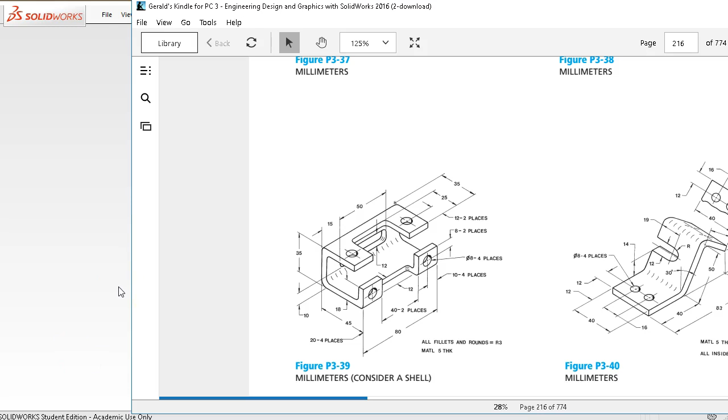P3-39 is in millimeters, and it has the note "consider a shell." This really doesn't lend itself, in my opinion, to a shell. I would lean towards sheet metal, and then we would be able to unfold this and actually manufacture it.

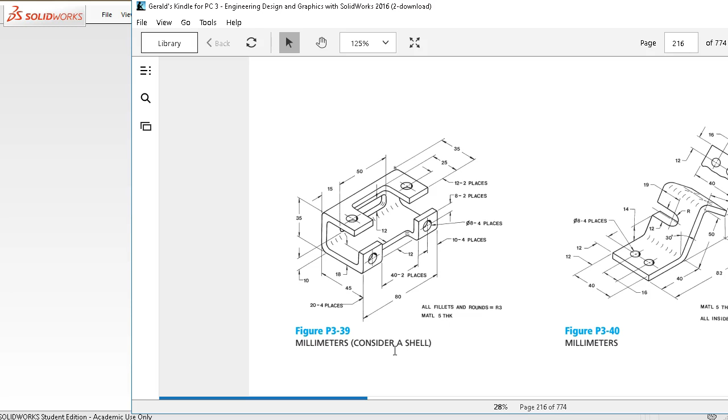So we've done this, I believe, in previous videos as thin features. Need to go back and check. I don't really remember if it was sheet metal last time, but these last two pieces are really, as far as the assignment, these two pieces lend themselves to sheet metal. So we're going to proceed with that.

If you drew it or already created it as a solid and did the profile and put the geometry in, that's fine. One of the issues with previous models is that these holes on the front kind of intersect the bends, and that's always a bit of an issue as we go through that process.

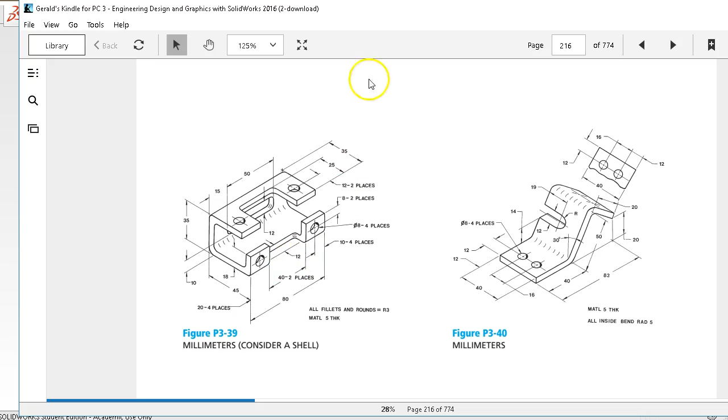Okay, so we'll start our part in millimeters. And thinking, there we go.

Alright, so one of the things we'll need is our sheet metal tools. Those can be found under Insert, Sheet Metal. Here's everything that we really need, but I would rather just have the CommandManager pull it up with a sheet metal tab. Since I don't use sheet metal all the time, I'll turn the tab off, and kind of the same with weldments. We can activate it, use whichever command we need, and then go back and uncheck it.

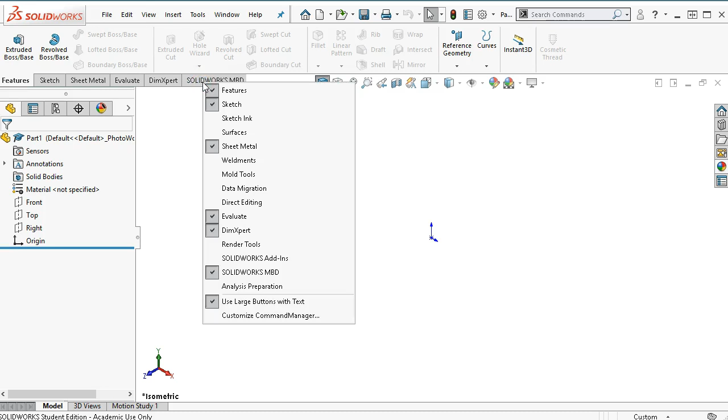So again, the thing with the tabs is do not uncheck all of them. That would be an enhancement request for Solidworks, to make it so at least the sketch is always checked regardless. Something along those lines, so you can't turn all of these off, because it's kind of a pain to get it to show back up if they're all unchecked.

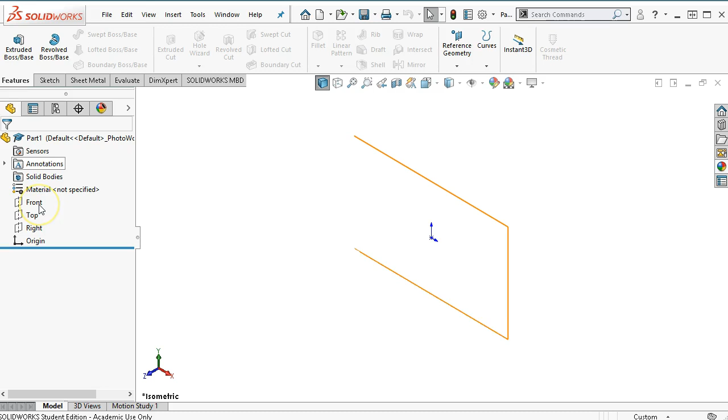So don't do it. Anyway, the sheet metal item, in the very early days of Solidworks, was called a thin feature. Let's see, I'm gonna go from the corner and up and over and back, and we'll put some dimensions on that.

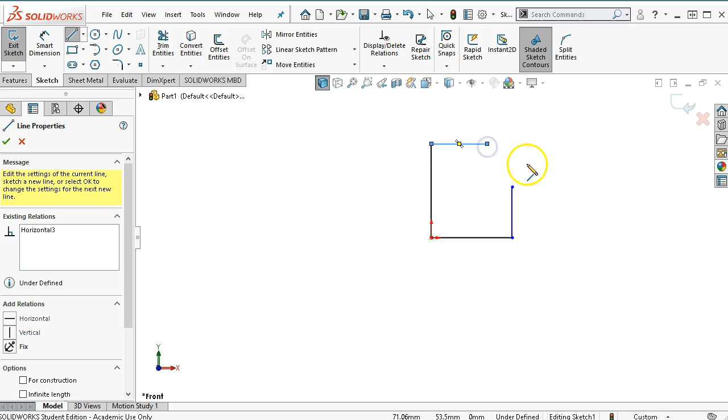And we had 45 along the flat, 35 on the height, and 35 on the length, and then let's see, have 8 from the center. Not quite seeing that one.

Pull it back in and get it to where I can focus on it. So 8 from the edge. Now there we go, 18. That's kind of a weird place to put it. 18 from the base up to the top of the flange.

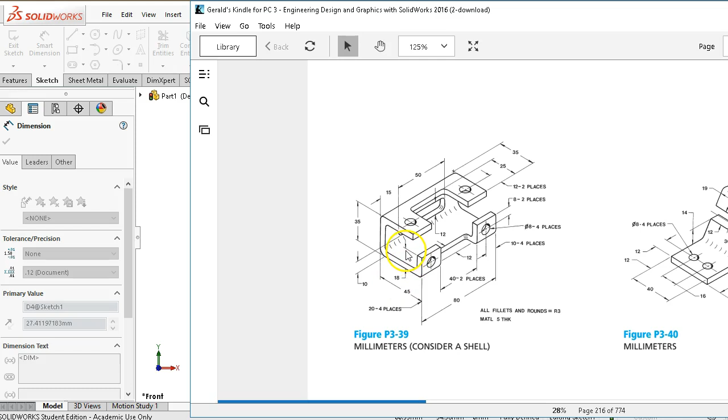Okay, so we'll double click on that. Once it's all highlighted in blue, I can overwrite it. And so the issue with making this as a solid part is the gap, the support.

There's really not a lot of material in there. So even at 5 millimeter, material thickness 5 millimeter with rounds of 3 millimeter, that's not quite gonna work. We'll get pretty close. I think 3 millimeter on the interior will be okay, but we're really at the point of being able to bend this.

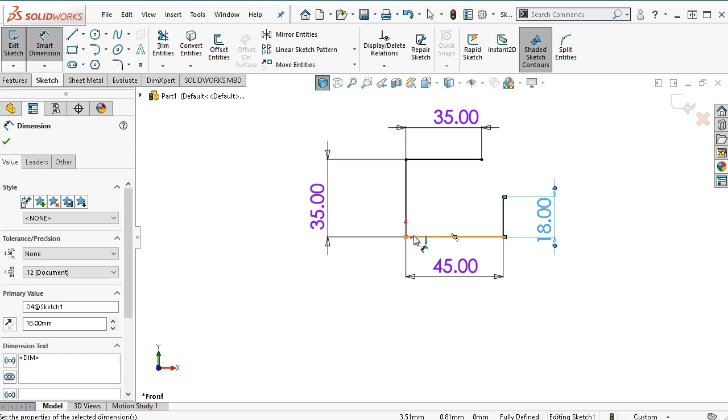So the other issue is having the offset fingers or brake dies to be able to get in and produce this geometry. So machining it's kind of an issue. Getting it to bend is also going to be a little bit of an issue with that small opening there. So we'll get it into the design.

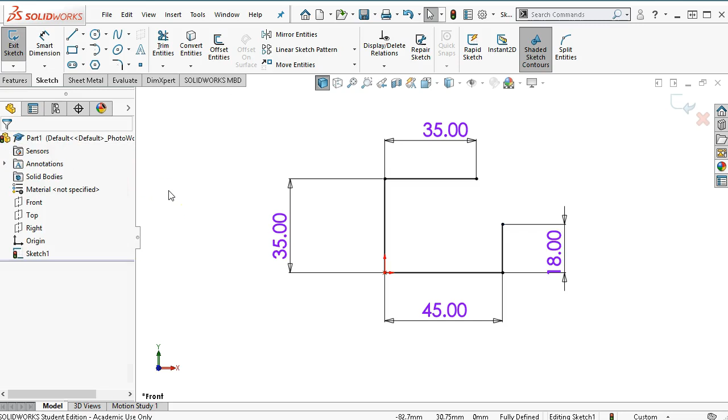In the early days of Solidworks, as I started to say, we would go into an extrude, and this would be a thin feature. We would have the 5 millimeter thickness, going to the inside, and with auto-filleting the corners, I think it's the interior, we would have 3 millimeters on the interior. Alright, so that was kind of limited in its scope and what we could do with it.

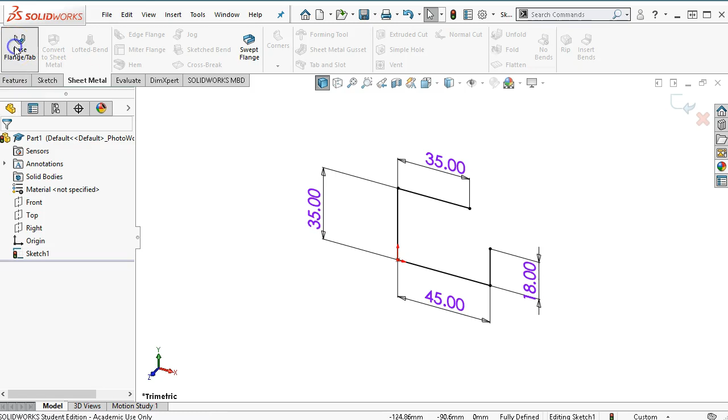So the sheet metal tool evolved pretty quickly and became a lot more powerful tool. So we have a base flange, which is going to act the same as our thin feature, at 5 millimeters thickness, 197, about 3/16. Trying to remember, that comes out to, I was thinking it was 10 gauge, but I have to look at the table.

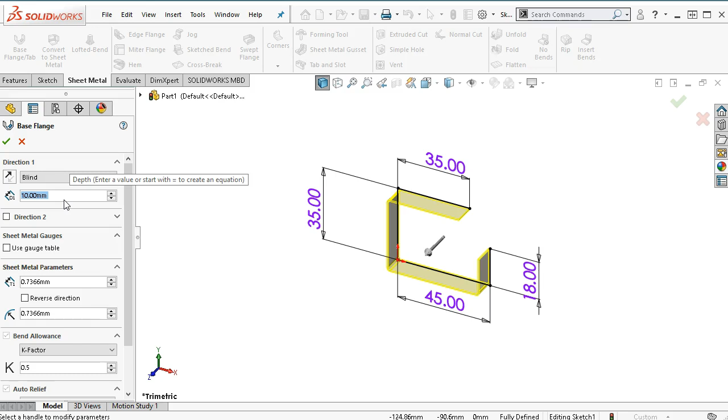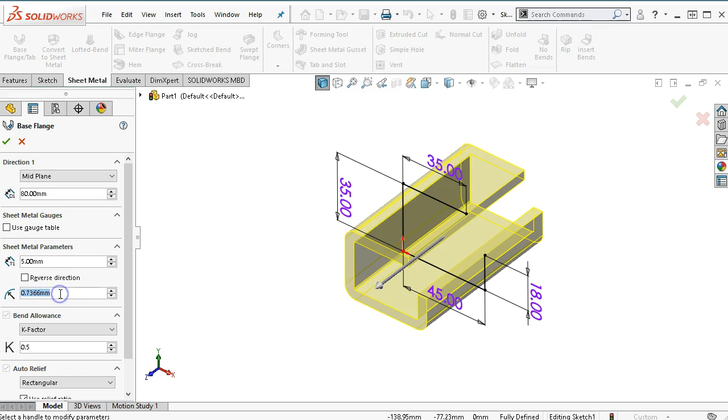So anyway, we'll go with the direction. We have an overall of 80, and I'm going to go ahead and make it mid-plane, just so when it unfolds, that's kind of at the bottom center. And the millimeters then, we'll go with 5 millimeters for the thickness. I'm going to rotate over and just make sure that it's interior bend, since our dimensions were to the outside. And then we have a bend radius of 3 millimeters. Alright, so that kind of pulls it back.

And then the K factor is where we equalize the forces of compression on the interior and the tension of pulling the outside apart. Usually that's around 0.3, depends on the material, but that'll give us a good start.

So as this bends and we're deforming this material, the material, as much as it grows on the flat stock, or grows or shrinks, we're trying to take that into account.

And then auto relief, if we had corners meeting the base, there would be an option of rectangular, tear, or obround relief, and the ratio is to the thickness of the material.

Getting more in detail, I jumped over the gauge table. We can put together more information, take material and do practice bends, and get those measurements to build into our gauge table if we want to get more precise.

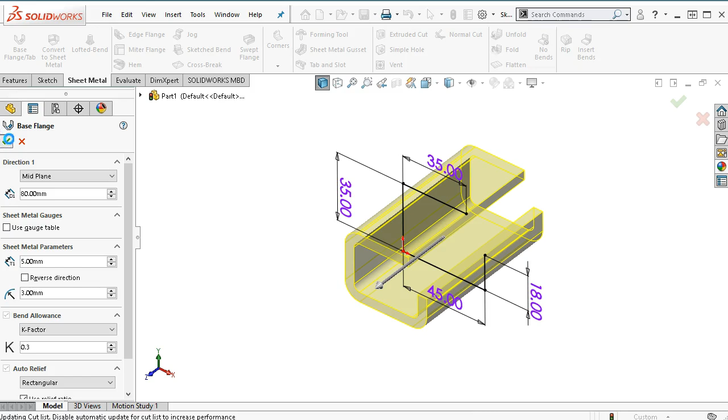So there's my shape, and that gives me the bent sheet metal. And we have a flat pattern. So just a quick check.

Interior measures 3 millimeters plus 5 means the outside would be 8. If we were to put a minimum of 0, this would shrink to just a sharp point, which 5 millimeter thick material is not going to like. It is more likely going to fracture no matter how ductile the material. So we need enough of a bend radius that the material can complete without tearing itself apart.

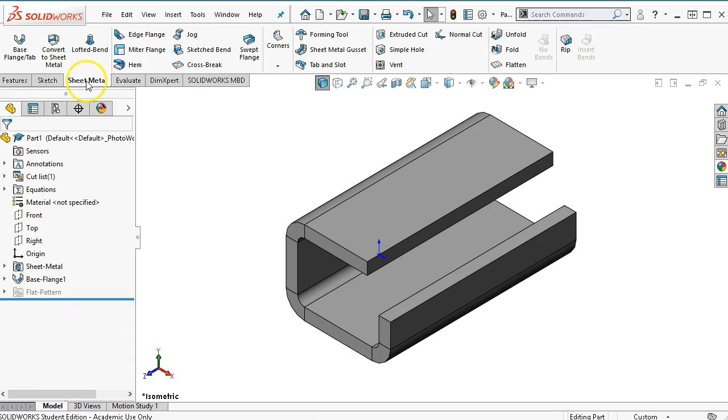So then the flat pattern is a suppressed feature. Let's just go back to the sheet metal and we will flatten. That unflattens it, so maybe it was this one.

There we are, there's the suppressed icon. So that unfolds, I need to keep my terminology straight. That flattens, and we can see where the bend locations are for each of those items.

So again, 5 millimeters being pretty thick, there's some definite challenges here. In our process, all of our geometry needs to be above the flat pattern.

And anything that is below the flat pattern doesn't really exist in the model, it only exists in the flat pattern. So we'll see that here in a little bit with some of the hole locations.

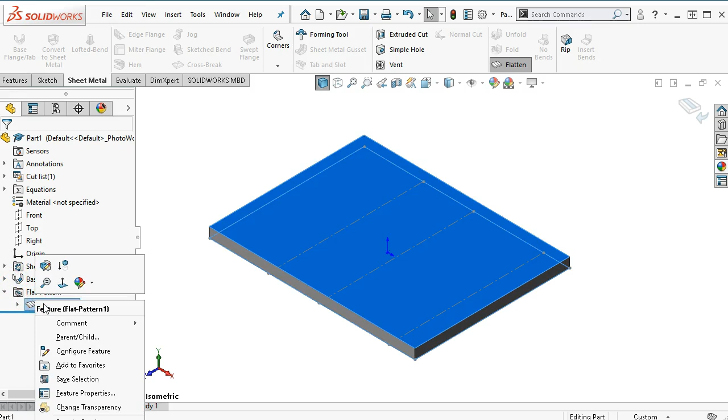So I'm going to suppress that back, or toggle with the flatten. And then because of the mix, well, let's see how far we can get with this. We'll go into a sketch, and it's just like we're sketching with our solid geometry.

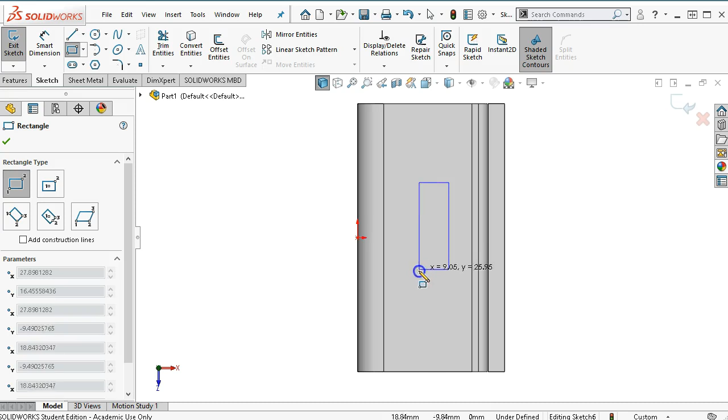Or our regular boss base extrudes. I'm going to select the midpoint, control select the line, set a midpoint, that will help center it up. I could also, because I put it on the origin, have that symmetry.

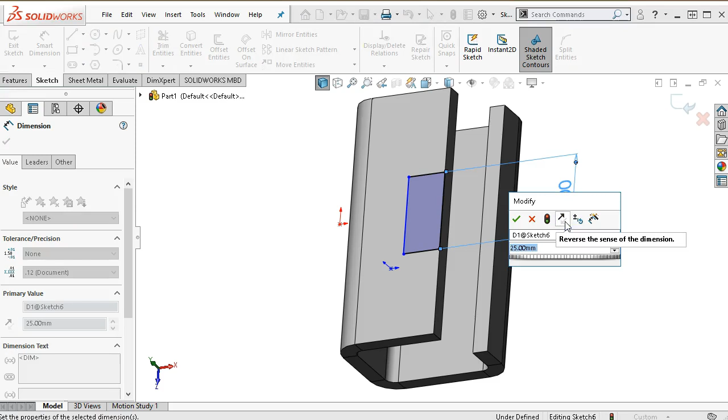I could drop in a center line and attach it to the center line. So we have a depth of 25. Oh, wrong way. Have a width of 50 to go with our depth of 25.

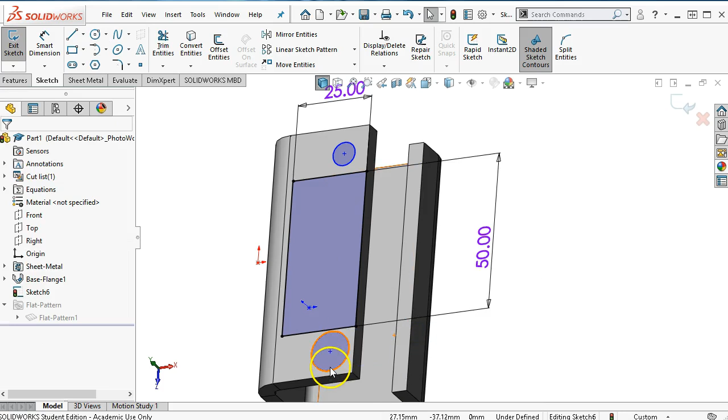And then the 2 hole locations, I'll go ahead and include those, and we'll make those equal. I could make these symmetric.

Go Control 5 so we can see the top view. And then the holes are 8 millimeters, for 4 places. They are 12 millimeters off the front edge of our bend.

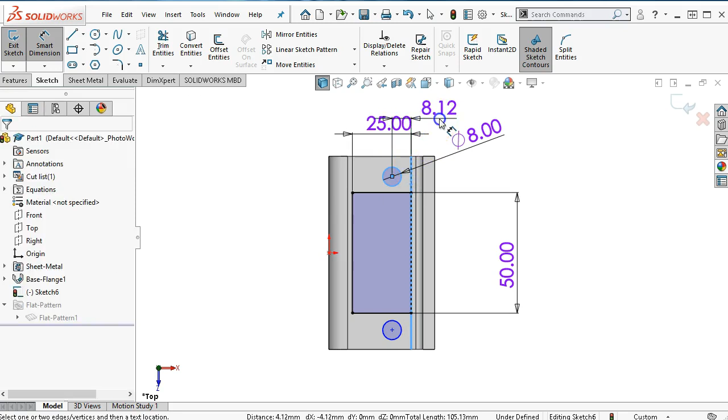So on that one, I want to do center point and Control select the center points and make those vertical. And then for interior, we have 10 millimeters off of the edge, 4 times.

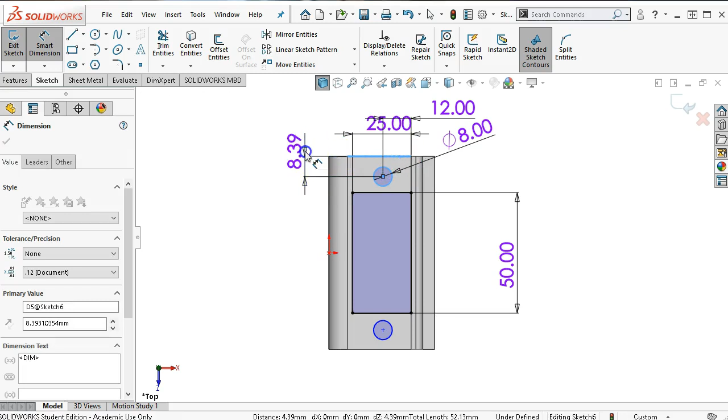Yeah, it seems a little closer, but let's see, 50 and 80, 15. Yeah, that's pretty much it.

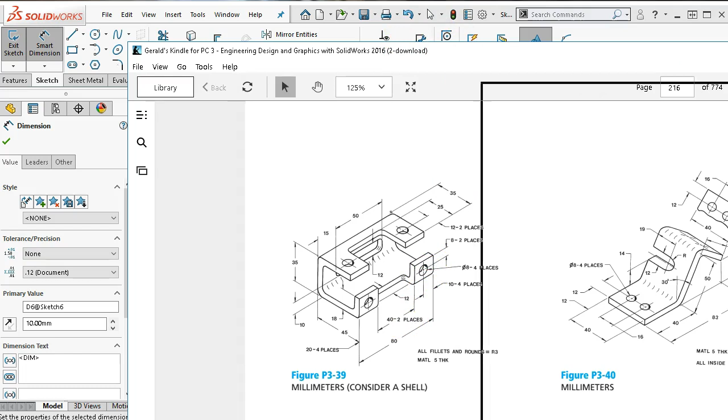Let's see, the 50, actually, look at that, the 50 is going to the through pocket, and the tabs is actually a 40. So that's 2 places. So as soon as I notice that gap closing up, then we'll try to correct for it.

Alright, go back into our features, Extrude Cut. We'll want to watch for the through all, because now it's going to punch all the way through the object. So in this case, we could go up to next, or if I choose to stay with the blind condition, with sheet metal you get the additional link to thickness.

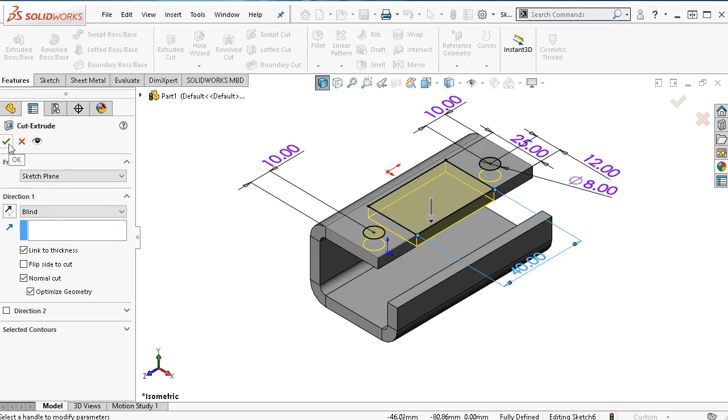And then if the material were to change from 5 millimeter to 4 millimeter to 3 millimeter, it will stay with the thickness of the material. Okay, so that gives me the one result.

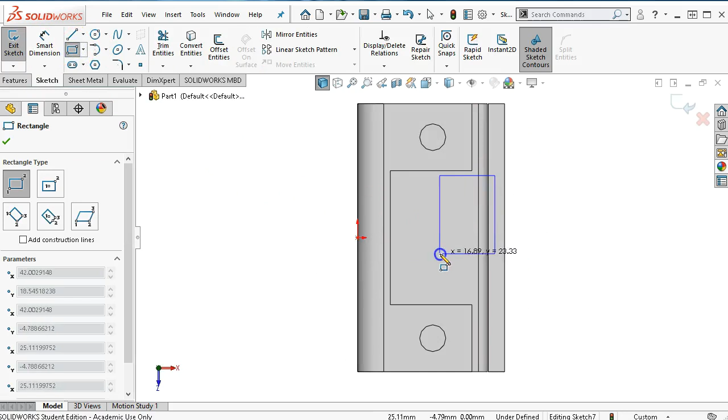And then let's go ahead and see what we can get with this geometry. I'll open up on the in face, and it's going to be the same type of process where I can select, Control select, get my midpoint.

I think I'm going to go ahead and tie it to the upper geometry. I don't want that face, so those become coincident. And then the depth is shown as 12 millimeters off of the interior.

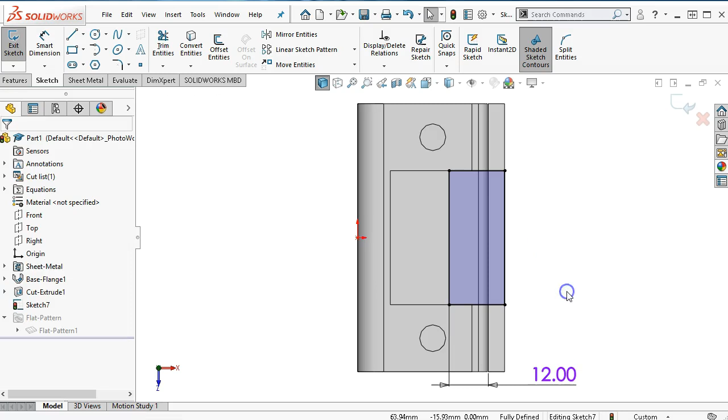Now that's still kind of a weird place to make the bend, but that would be 20 millimeters off of the front side. But I guess it depends on the ability to make that isometric dimension make sense.

Alright, so we'll cut through. This one can go through all. There's not anything on the side to conflict with.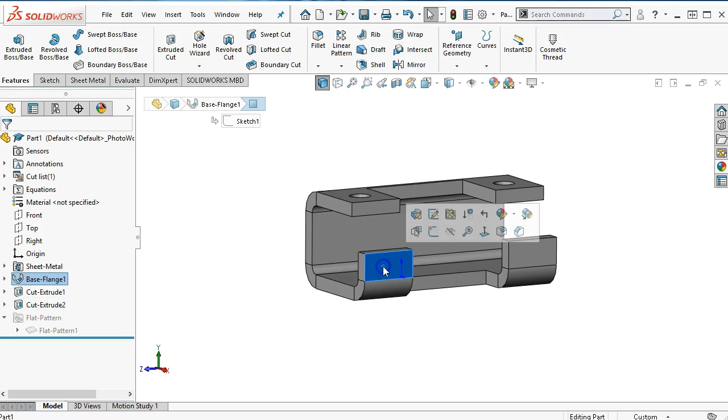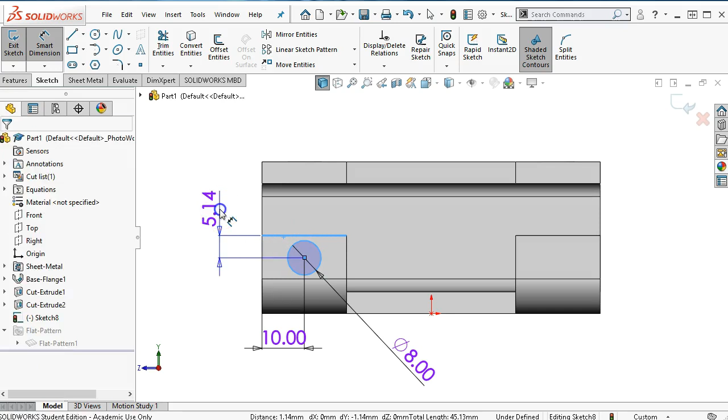So the issue here, let's just put the one hole in, and this is diameter of 8, 10 millimeters off of the edge, and 8 millimeters from the top. Alright, so right now it's above the bend in that flange, but as soon as I put in the 8, we're crossing over the bend. So that's going to lead to some deformation later on that we really don't want to deal with.

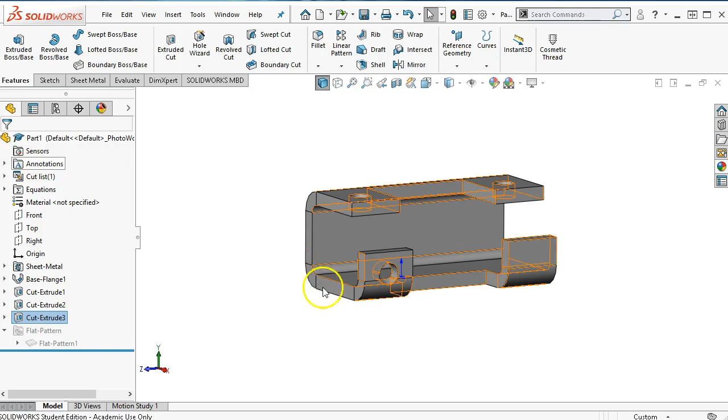So let's go ahead with an extrude cut. I'll give it the, well, I think the link to thickness. Let's see how it does. Oh, rotate it around here so you can kind of see that it's deformed the sheet metal as it goes through the curve, so that's really not a desirable result.

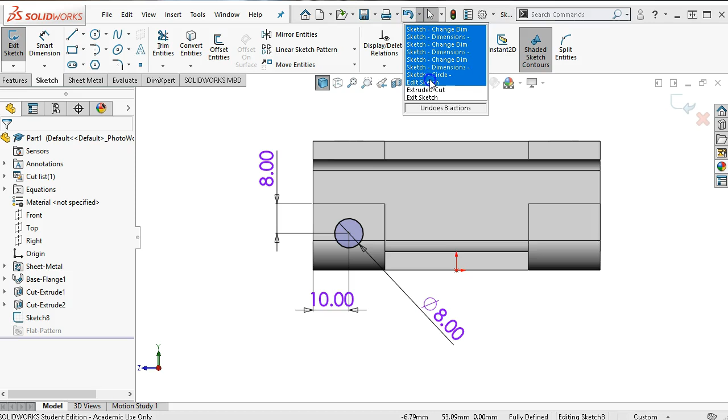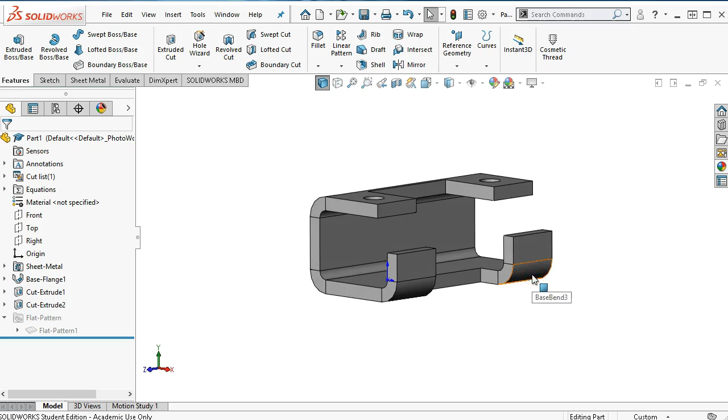So in that case, we're going to Control Z and get back out of the sketch, and actually on the undos, well, should have just gone ahead and deleted it. On the undos, we can go back to where we were editing the sketch, and let's see if we go yes. Alright, so got to watch that one because occasionally it will go back too far, and so always a little nervous when that happens. Alright, so before we jump into that last piece, let's go ahead and get the window through the back.

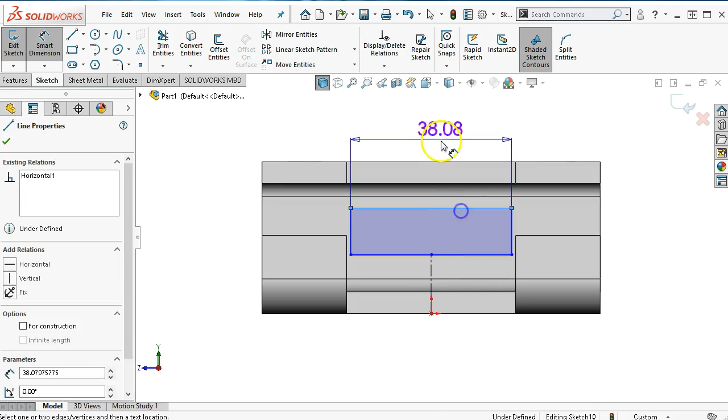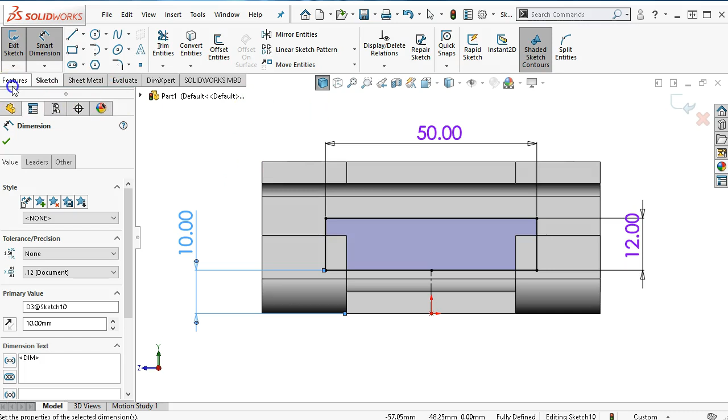Alright, I mentioned the center line. I'll bring it up from the origin, find the midpoint, make it vertical, and then it is 50 by, looks like 12. And then its position is 10 off of the base. Okay, so that looks pretty good. Just double checking the numbers there. So this one can be an extruded cut, and it'll link to thickness, and we'll have the window.

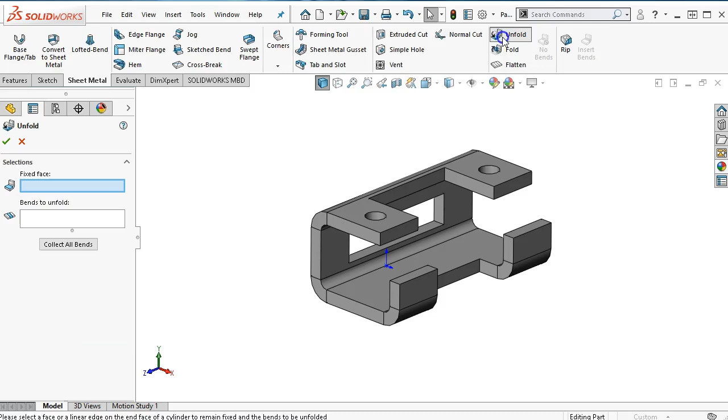Alright, so to complete, I know that that's going to be a little bit deformed, or we're going to have to deal with it somehow. I want to go ahead into the sheet metal, and if we put it on the flatten, then it exists after the flat pattern. We need to unfold our geometry, so we will have a fixed face and then collect all of the bends. And even though I don't really need to collect all 3 bends, we'll go ahead and include them. So if there was any other geometry that we wanted, anything that spanned the bend, we would include it in this one. So kind of as a general rule, I only want to unfold once, or in certain cases the software has only let me unfold once.

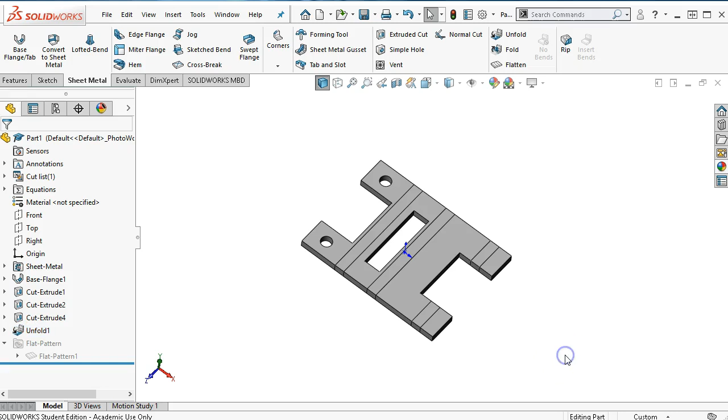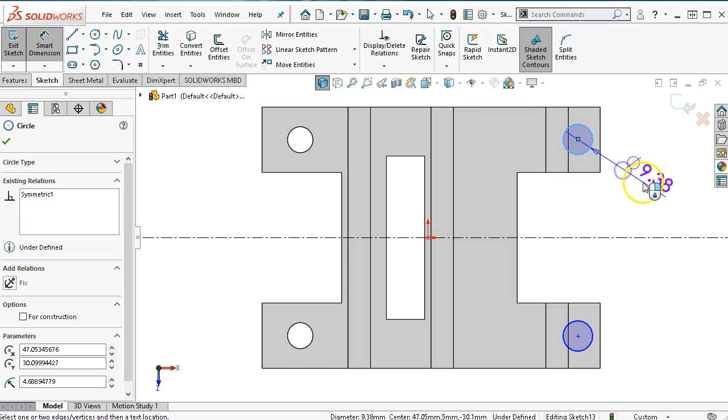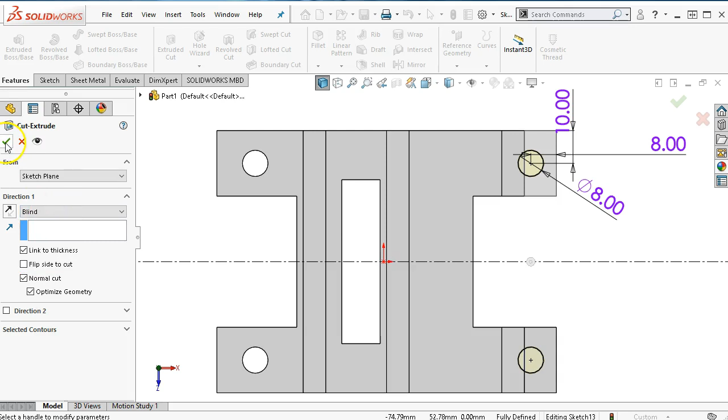So I Control 5, we'll go into the sketch on the face. And I think I will just go with a horizontal center line and mirror. And we have our diameter of 8. Ten off of the side, and then 8 from the top. Alright, so where that passes through the bend now, we're going to make that cut. But now, I didn't flatten it, I unfolded it with just the cut. And I know that it's still going to deform, but this ensures that when it's in this flat pattern and we're putting it on the laser or the plasma or EDM, whatever is going to cut this shape out, that we're going to get that geometry.

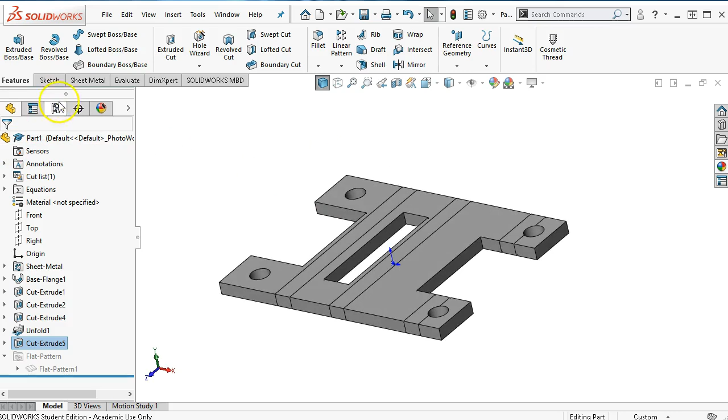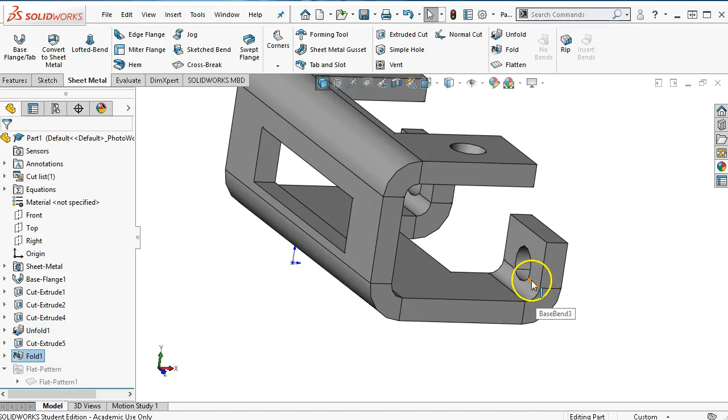So let's go ahead and fold this back up. So after we've created the unfold, then we're going to do the opposite and fold it back up. And so it finds the fixed face that we had previously. We'll collect all of the bends. I've never really tried it, but now the deformation is more of a teardrop shape. So, you know, going across that bend, we would still expect it, but it's a little more circular than probably what it was.

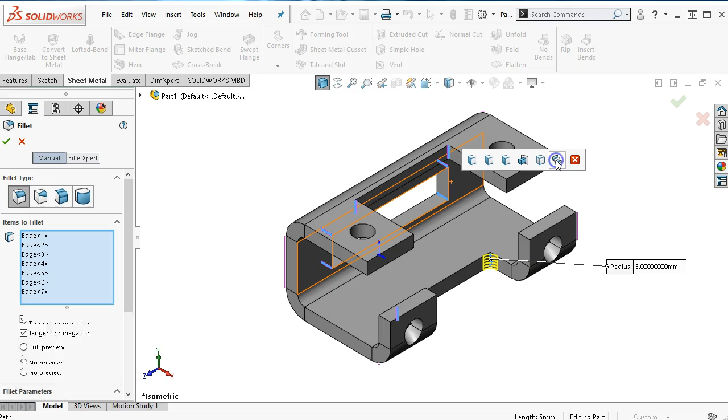Alright, and then our last process will be to create the fillet. And we still have the 3 millimeters. And I'll go find another edge so that I get the pop-up. And I'm looking pretty much for the combinations. Well, that would be everything. That's a little scary. So all of the concave edges, the interior, the tops, the sides, I think that's the one I want. And we'll go ahead and accept.

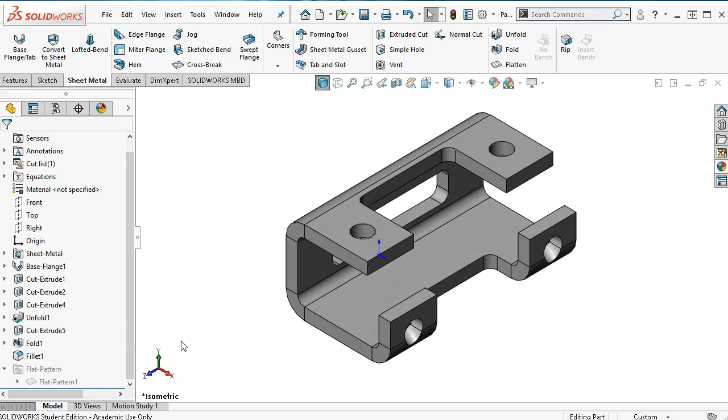Alright, so that gives me the sheet metal part. When I go into the flatten now, I'm going to see those shapes and all of those radiuses. And then when I unflatten or suppress the flatten, it puts it back into our geometry. So sheet metal has a lot of powerful tools. By the time we go into the rest of our geometry, we can do quite a few shapes and make some really cool geometry.